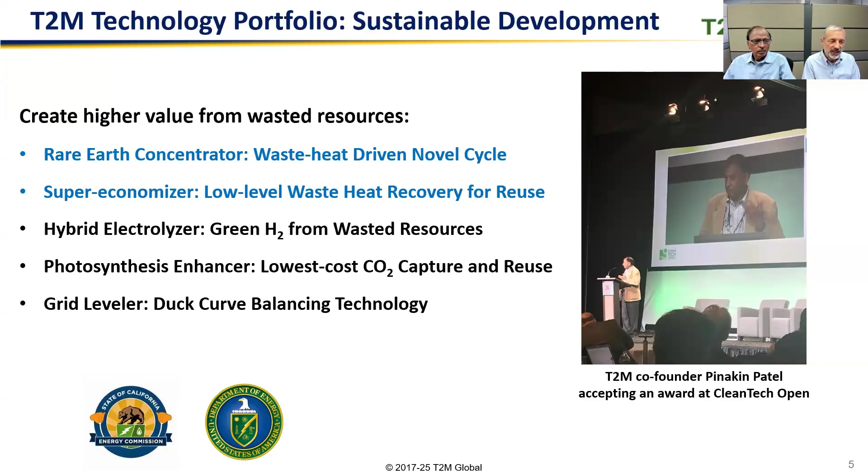We have a strong team with over 300 years of combined experience in new energy technology development. We're very fortunate to have an excellent advisory board with prominent advisors, including professors and former managers from DOE, CEC, and utility companies. And we have a good balance of public-private partnerships and university partnerships.

Waste to value technologies, which we call WTV for short, support the circular economy. Specifically, we focus on using them to increase manufacturing competitiveness in an environmentally sustainable fashion, using what we call an R3 approach for WTV technology: recover, recycle, and reuse. I'll highlight a few examples of WTV technology in the next few slides.

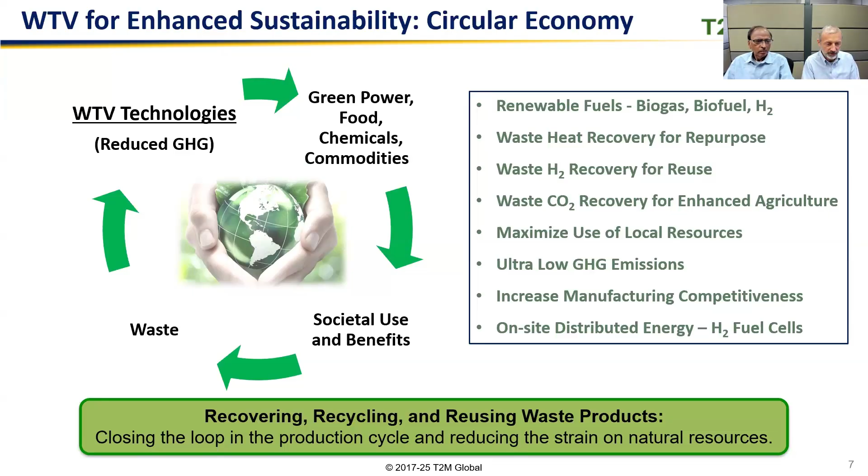In the case of trigeneration technology, human waste is converted to biogas in an anaerobic digester, and then a fuel cell extracts hydrogen from the biogas and converts it to electricity at high efficiency. The fuel cell also co-produces high temperature heat, which can be used to produce steam for manufacturing processes. The third co-product in trigeneration is renewable hydrogen, which is extracted from the fuel cell exhaust.

And that hydrogen can be used to power fuel cell cars and trucks, or as a chemical in petrochemical plants. Pinakin led the development of this new technology, which you see here on the top left, a first of a kind in the world unit.

It was demonstrated for multiple years in California. Then Toyota picked up on the idea and supported a 10 times scale up at the Port of Long Beach in Los Angeles, which you can see on the right side. That plant has a net power output of 2.3 megawatts. It co-produces 1,200 kilograms per day of clean hydrogen for the vehicles you see there that are in service at the port or that are coming in from ships. It also co-produces 1,400 gallons of fresh water every day.

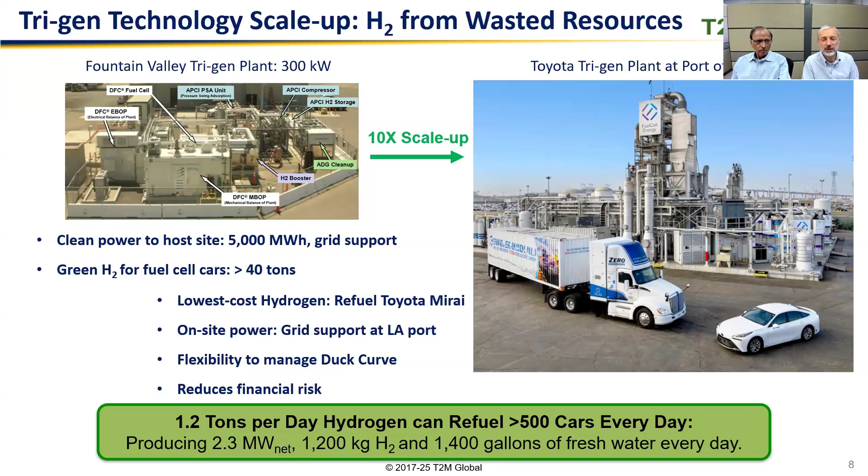Another technology we have developed to balance the grid makes use of wood waste, mostly from wildfire prevention efforts and forest management activities. This can pile up in huge quantities in wood yards, as you can see on the left here. And that gets converted to green syngas in a novel biomass gasifier.

Using excess electricity, T2M's proton pump then converts the syngas into renewable natural gas and clean hydrogen. That can either be used in a refinery here or converted to high efficiency stationary fuel cells to provide demand response for EV charging, microgrids, or for on-site power.

And we believe that this technology could be very useful in remote areas such as critical materials mines that don't have a grid connection.

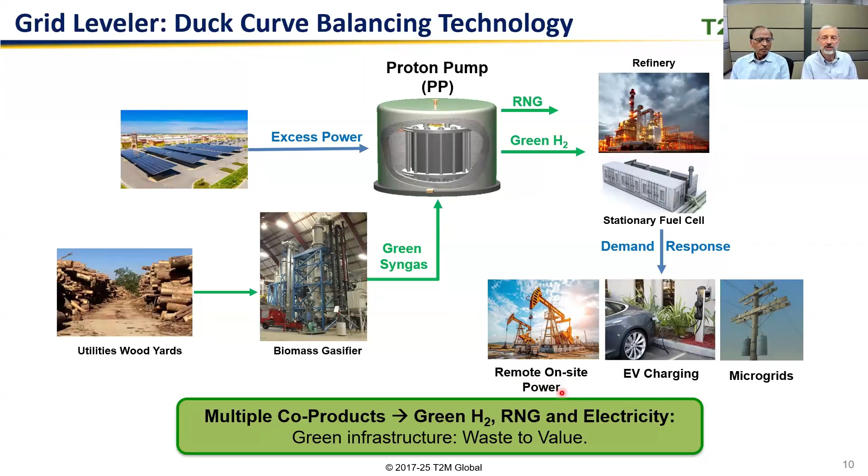So the next 5 slides focus on low temperature waste heat, how we can recover it cost effectively, and what we can do with it. Out of 100 quads of energy used in the US every year, about 25% is lost as low-grade waste heat. And that corresponds to a $200 billion lost opportunity.

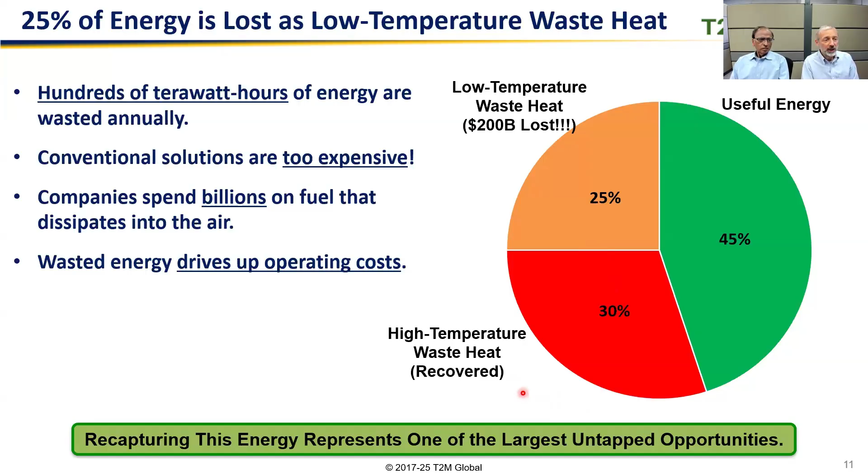If that low temperature waste heat could be recovered and used, it could really lower operating costs and increase US manufacturing competitiveness. It's one of the largest untapped opportunities. And all that is because conventional economizer technology is too expensive.

That's why our team has developed super economizer technology, which has multiple advantages. First is the higher efficiency. It recovers a lot more heat. It's more compact, which is great for retrofits, as you can see on the right here, squeezed behind a process tank in a manufacturing plant.

And it's also much lighter, as you can see here, being held without effort, whereas the corresponding conventional economizer would be way too heavy to lift.

And it's also much lower cost. That means the return on investment can be as short as 1 to 2 years compared to 5 to 15 for conventional economizers. An important feature for lithium extraction is that it has much better resistance to corrosion and fouling, and Pinakin will elaborate on that later.

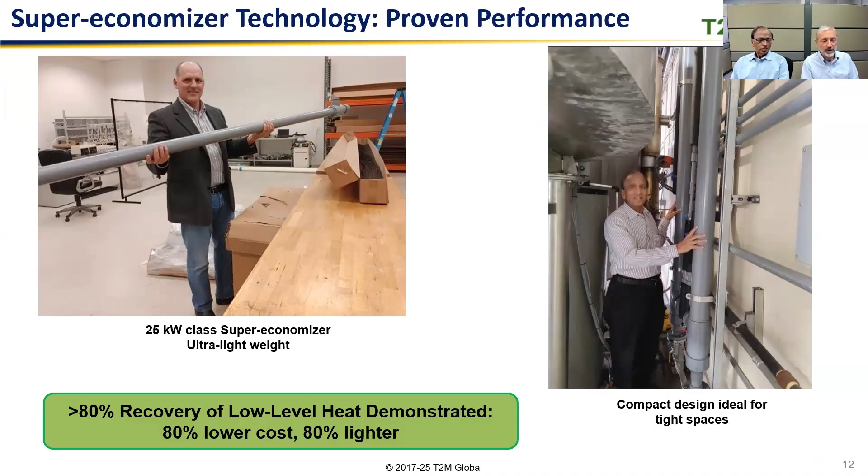So very useful for critical materials. Now, this table shows data from the 25 kilowatt super economizer testing. You can see heat exchange effectiveness is more than 80%, which is about twice that of conventional heat exchangers. And we have multiples of these in operation at a manufacturing site for now well over 10,000 hours, and we're observing stable performance.

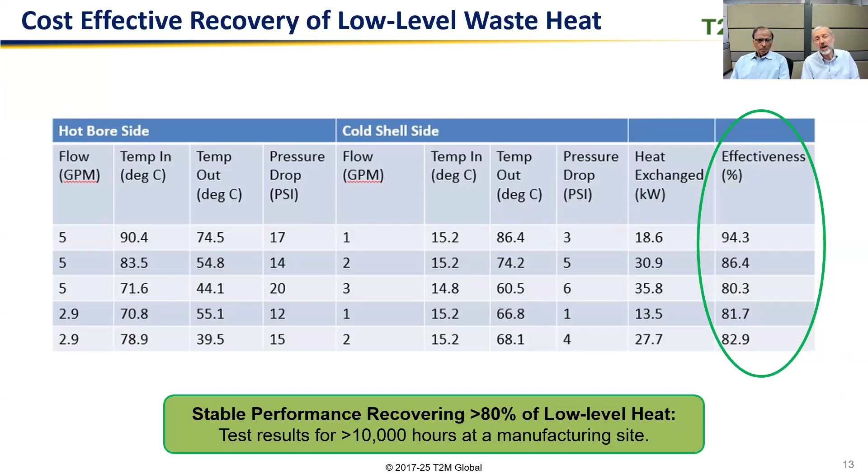So what can we do with 60 to 80 degrees C heat, you may ask? It can be used for process improvement or power production. So here we show the power production.

Current commercial cycles, such as Rankine, Kalina, and so on, they're not cost effective for low-level waste heat. They use reciprocating engines or steam turbines. And we have developed a novel cycle that we call Pinakin cycle to convert this low-level waste heat to clean power. So it uses a novel membrane, which then pressurizes a fluid which goes to a water turbine.

That's very well proven technology and lower cost than steam turbines and very reliable. Now here the waste heat comes in with the super economizer that's used to separate the fluids again, and they go around in a loop. So there are no emissions of this whole cycle. We've demonstrated it at 5 kilowatt level and now scaling up to 25 kilowatt.

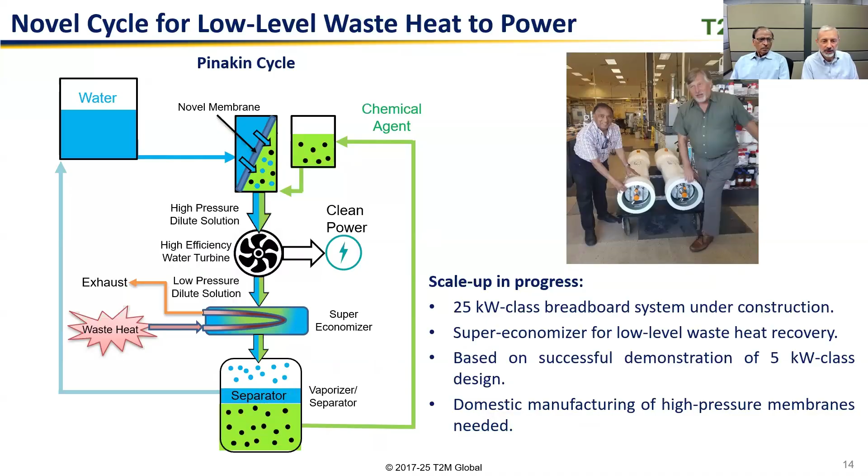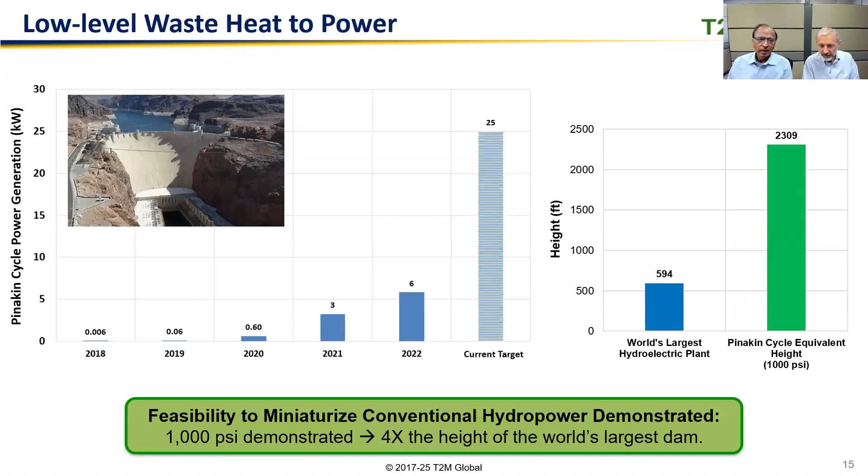DLE, direct lithium extraction, is part of what I want to talk about. I want to talk about two things: how can the USA go from less than 1% to a major producer, and also bring the cost down sizably?

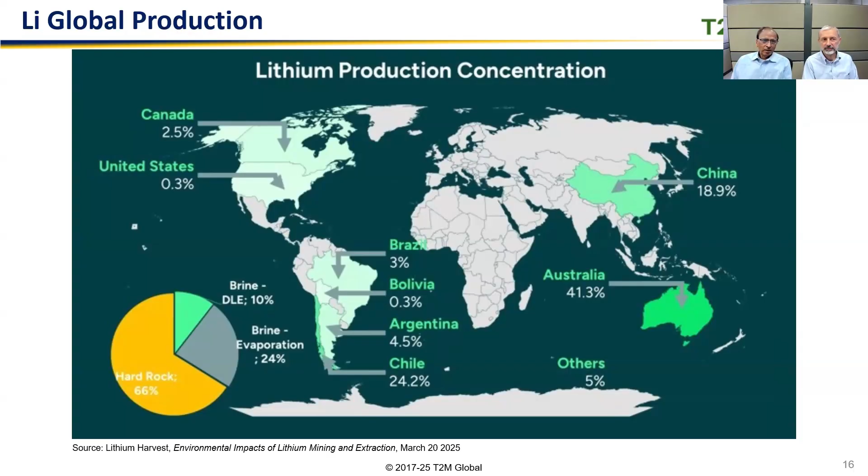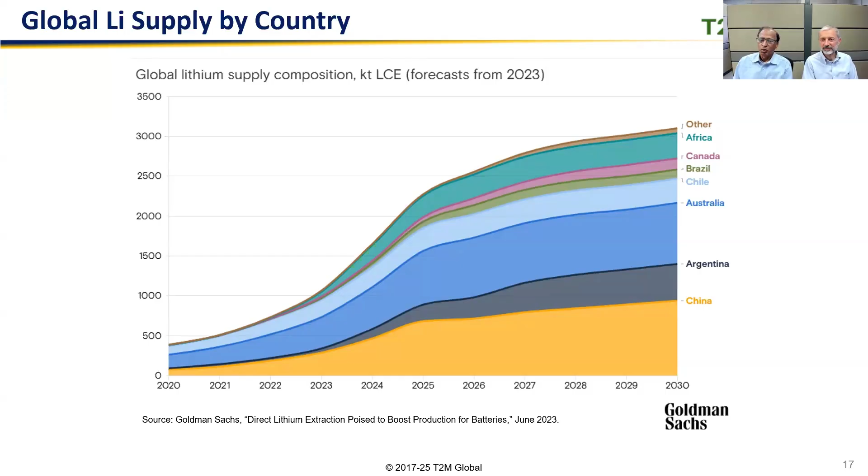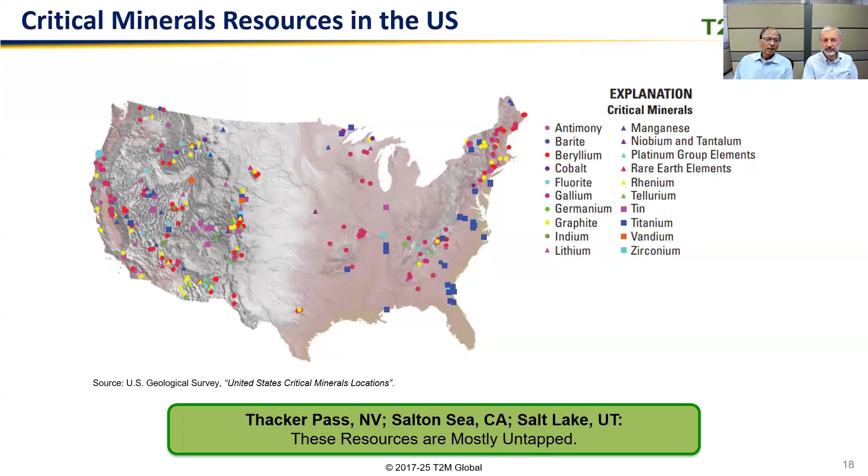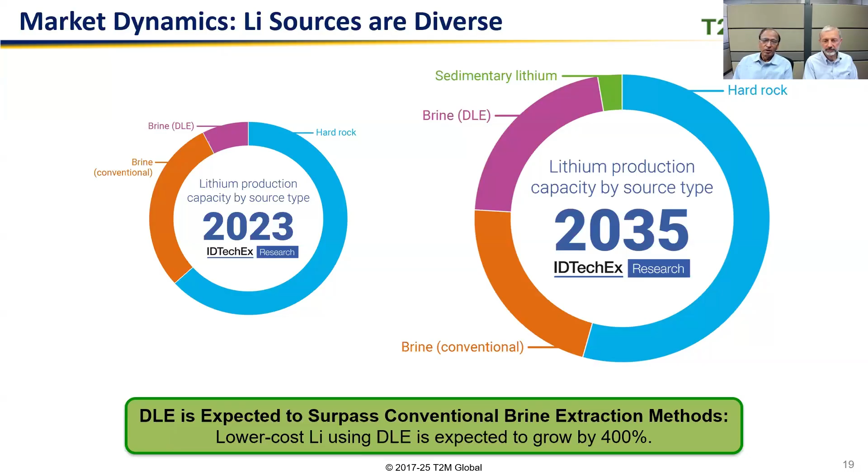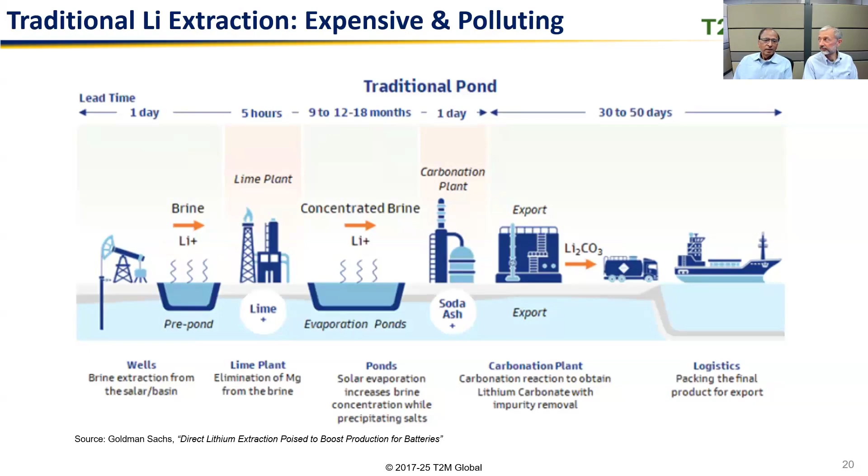Separation of multiple minerals is important, but they are also with lower value sodium, calcium, and chlorides. So you have a separation challenge with low concentration. You have to handle large amounts of water that can cause environmental impact, as well as keeping the ecological balance, which is going to be very important. Particularly in the USA, we have a lot of rules to keep safety of people and safety of the whole ecosystem.

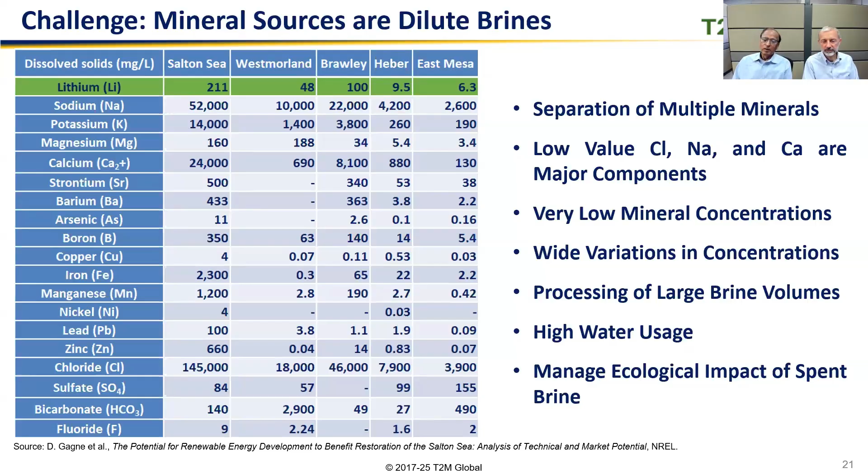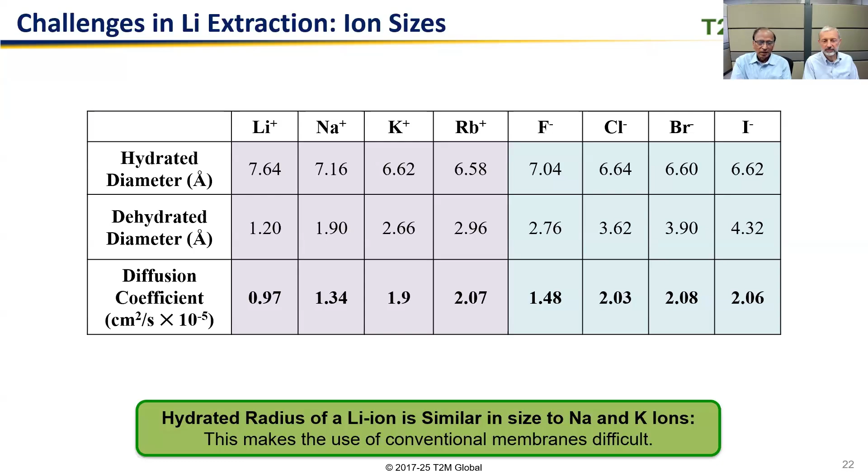The first way is separating by the diameter of ions—lithium, sodium, potassium. This shows their hydrated diameter, and you can see they are pretty similar, so it's very difficult to separate lithium from sodium and potassium using conventional membranes. So you need more selective membranes, and I'll talk about that. If you look at the dehydrated diameter, you see the differences, and that can lead to some potential innovative processes. Quite a few companies are looking at that, and we'll talk about that next. So these are the high-level technologies.

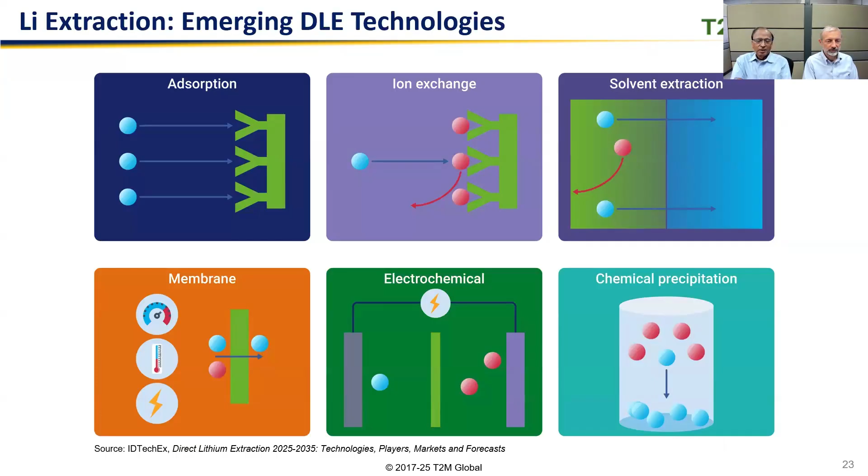Emerging DLE technologies include adsorption, where selective adsorption of lithium ion or lithium compounds takes place, followed by desorption to recover it. Similarly, you can apply more selective ion exchange methods, solvent extraction, or highly selective membranes.

More recently, electrochemical processes are being investigated. Ludwig and I spent our careers mostly in electrochemical cells, and this system does provide unique advantages, but there's also quite a bit of work involved. At the end, you want to preferentially take out your salt, lithium carbonate.

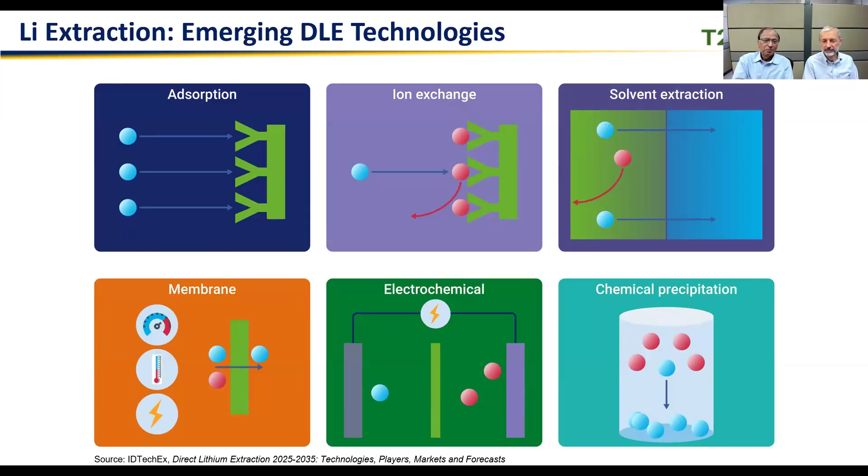So let's see where these processes stand. These are similar technologies: adsorbent, ion exchange, and electrochemical separation. You can see the adsorbents are being used commercially. They have an adsorption, desorption step, sub-batch process, and that has a challenge of cost effectiveness, though more than 80% recovery has been demonstrated, with a potential of going more than 90, as much as 99%.

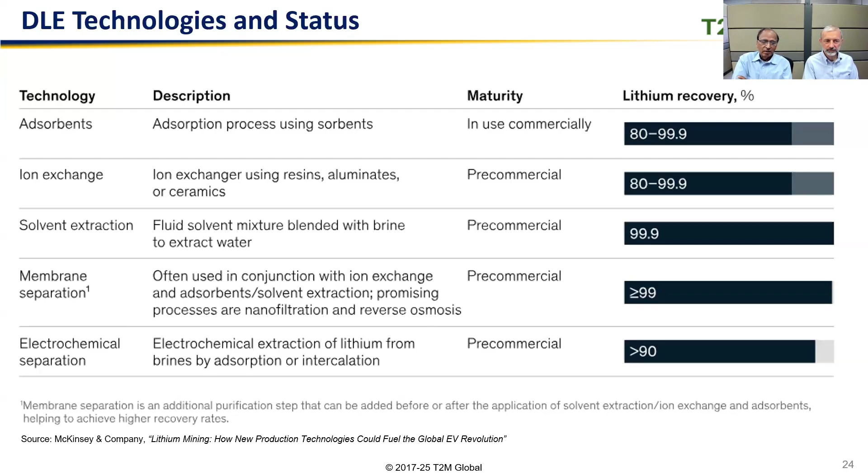Ion exchange, solvent extraction, membranes - they use different materials to do the work, but they are all under development, what we call pre-commercial stage, though they promise greater than 90% recovery of lithium. So let's look at some of them.

Advanced membranes - it's very interesting to note that for the technology Ludwig described on our membrane, waste heat to membrane power, what we're calling the Pinakin cycle, there are no major manufacturers in the USA. Innovation in membranes is now happening in other countries. So this is a very important low-hanging fruit.

Which are the membranes? Reverse osmosis, nanofiltration, ceramic membrane. Fuel cells are based on ceramic membrane. For example, Fuel Cell Energy and Bloom Energy, they lead in ceramic membrane manufacturing, particularly with electrochemical applications. So the membrane area is a very important part, but it has to be also in conjunction with other steps, as shown here.

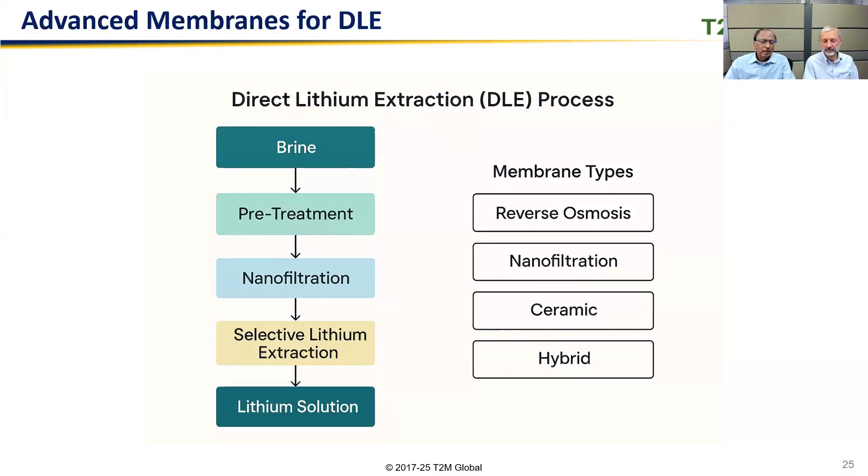I'll explain this more. So where are the membrane pathways? Same membrane list on the right. What are the advantages? Reverse osmosis is the most proven - it gives you 50% to as much as 90% water recovery, which concentrates the lithium.

But because you have membrane fouling issues, the lithium recovery could be limited, so it's used as a pre-treatment. You concentrate to a certain level, then go through nanofiltration, ceramic, or hybrid membranes. The last one is what we project has a bigger opportunity, because it's running on very little electricity - you have waste heat you're throwing away, less than 100 degrees C, and you can drive forward osmosis. That's the membrane module I'll explain to you.

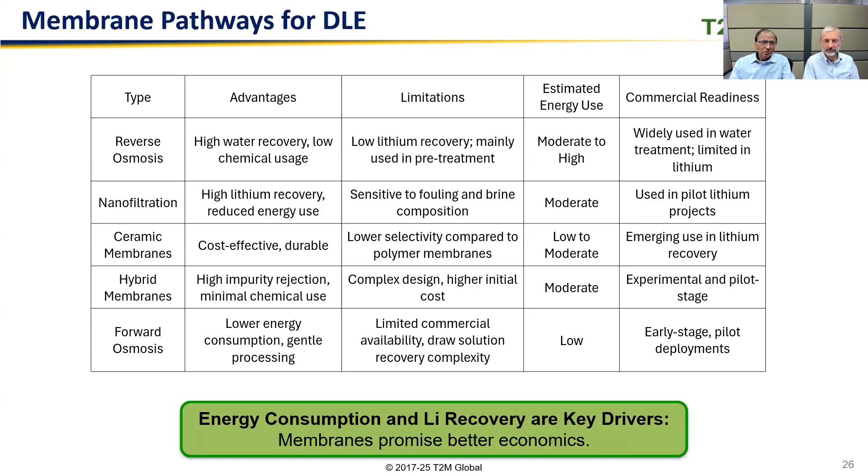So now you end up with lithium chloride. And that lithium chloride, using the forward osmosis membrane concentrator - that's what Ludwig talked about earlier - the technology our team is working on can concentrate 2 to 10 times lithium, depending on how you run it. It also provides high quality water as a byproduct.

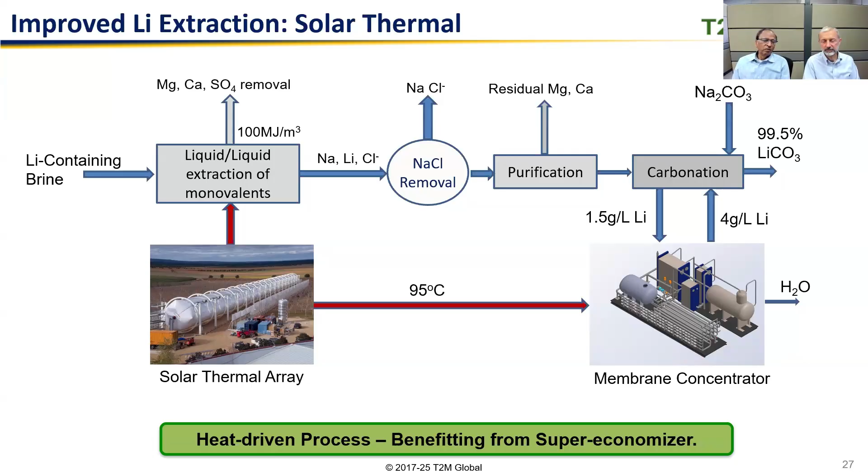So this benefits from super economizer technology as well as solar heat. Now, the waste heat driven process - you look at the solar, the lithium salars, brine, and using the module of advanced membrane. And as you saw earlier, lithium carbonate is the product.

What is unique is that in the process you are using heat, and that low level heat typically goes into a cooling tower. That heat now is a right input to produce electricity using the super economizer and water turbine cycle that you saw earlier. So this is the unique WTV technology - the waste heat and the very dilute concentration, and now you can get electricity back. So basically, this makes you more sustainable with greater manufacturing efficiency and lower cost.

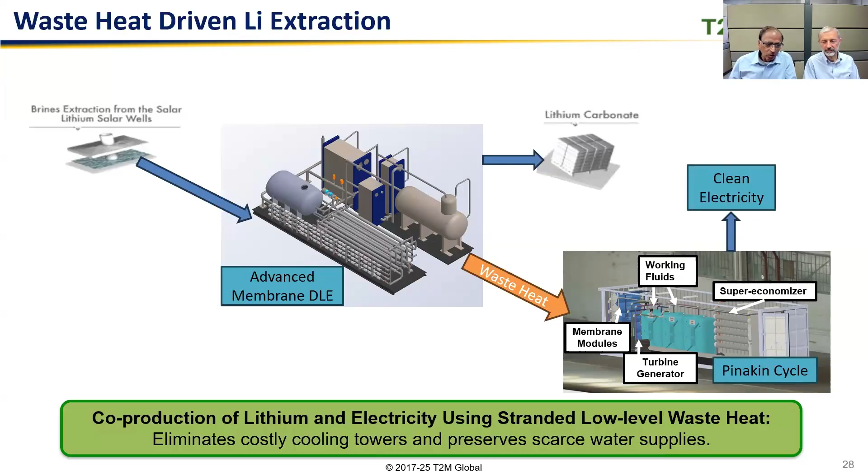Another application after solar thermal - you can combine with geothermal. The bottom half is the production well on the left-hand side, where the hot brine comes out. On the right-hand side is the injection well - after separating lithium, you put everything back in the ground. So you're not changing anything, no environmental impact. You selectively took out the lithium. How did you do that? It's the same cycle.

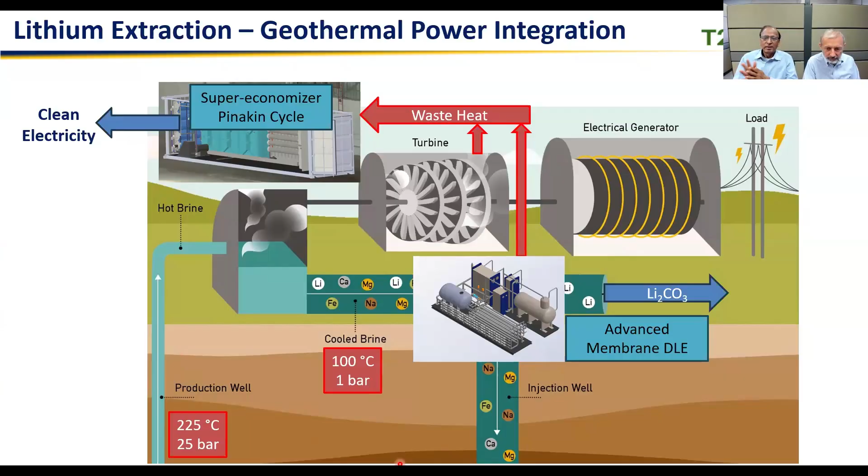You use first waste heat driven advanced membrane, but then the leftover waste heat goes into our super economizer cycle, and that electricity you produce will support your lithium extraction process. So this is a win-win combination of high level heat available from geothermal, running a turbine, and then powering advanced membrane. The combination results in lower cost lithium extraction.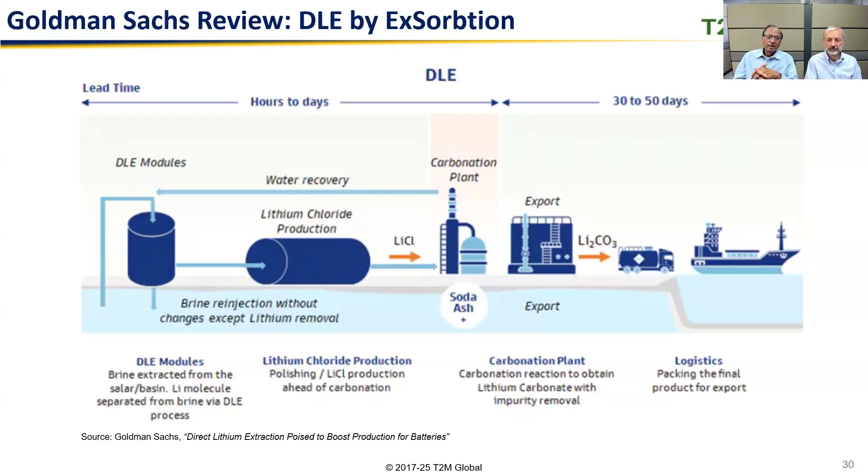So where is ExSorbtion now? They have shown in the lab greater than 99% lithium selectivity, which is excellent. Their efficiency numbers are greater than 90%. They have shown 500 cycles based on manganese-based sorbents, with lithium uptake about 10 milligrams per gram of sorbent. If this capacity can be increased, it can reduce cost sizably. Regeneration time has also been improved.

It is versatile across varying concentrations of lithium, and the use of CO2 makes the process a carbon sink, so you are benefiting from CO2 emissions. The most important value is that the lithium carbonate is directly compatible with market demand. It has been tested with oil field and geothermal sites, and smackover brines from USA, Canada, and Argentina.

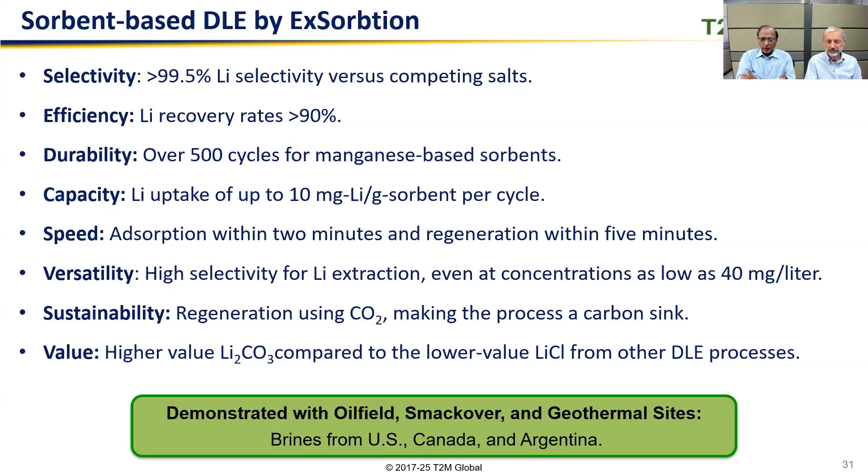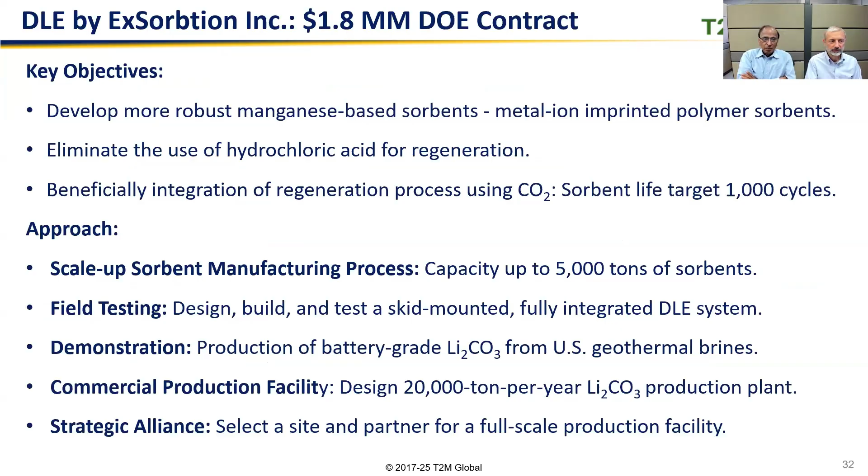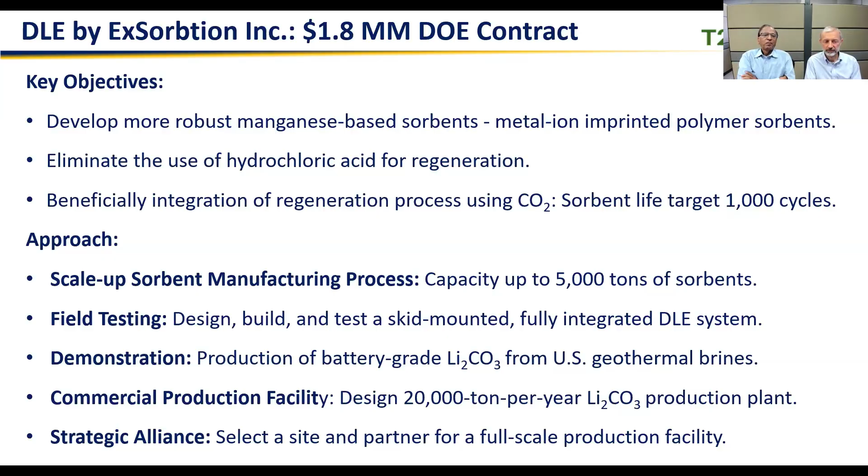Where they are now, they have about a $2 million DOE contract to improve the sorbent robustness, make it more diverse with greater selectivity, eliminate use of hydrochloric acid which is an environmentally attractive goal, and integrate CO2 and double the cycle life. They are also looking at scaling up the sorbent manufacturing process, doing field testing, and commercial production facility design. This is a very important step being taken by DOE.

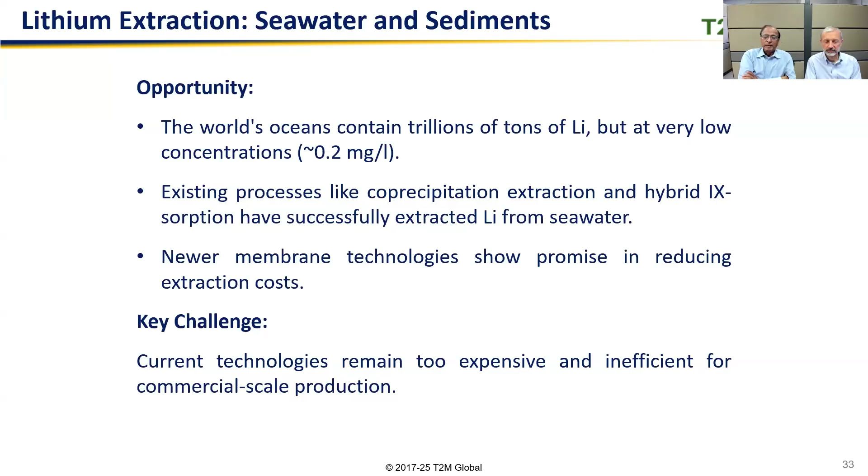Seawater is the largest source of lithium, and for that matter all minerals, but they are extremely dilute, about 0.2 parts per million, sometimes even less depending on location. Existing processes like precipitation and hybrid adsorption have extracted lithium from seawater, and newer membrane technologies can reduce the extraction cost. Most important is reducing the capital cost and operating costs needed for commercial scale-up.

Another technology is electrochemical. The diagram is shown on the right. Saudi Arabia is doing quite a bit of work in this area. This uses an electrochemical cell with a ceramic membrane, lithium lanthanum titanium oxide, LLTO. Co-products are lithium, chlorine, and hydrogen. They have tested 0.18 ppm lithium over multiple cycles, concentrating it to 9,000 ppm.

There is a control factor. Electricity consumption is important. Today's electricity cost is $5 per kilogram of lithium, and that needs to be reduced, along with development of a more robust membrane.

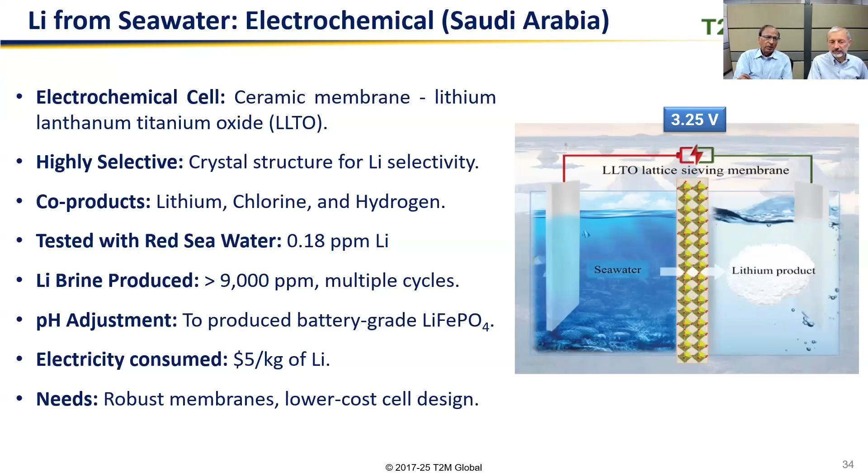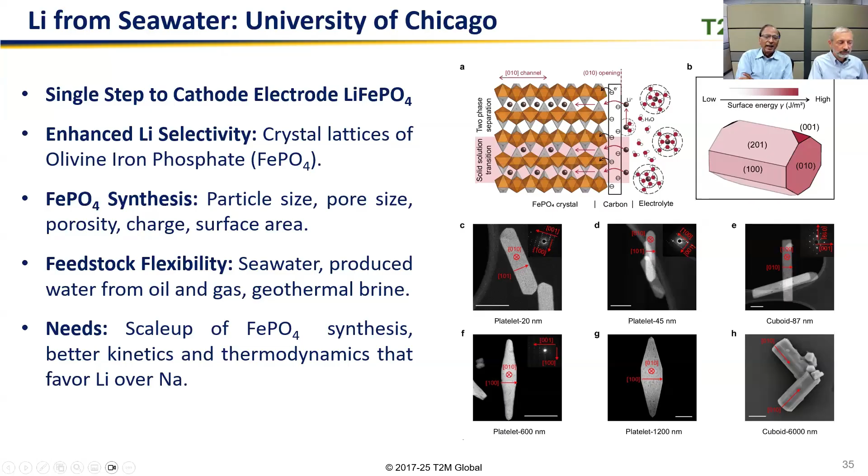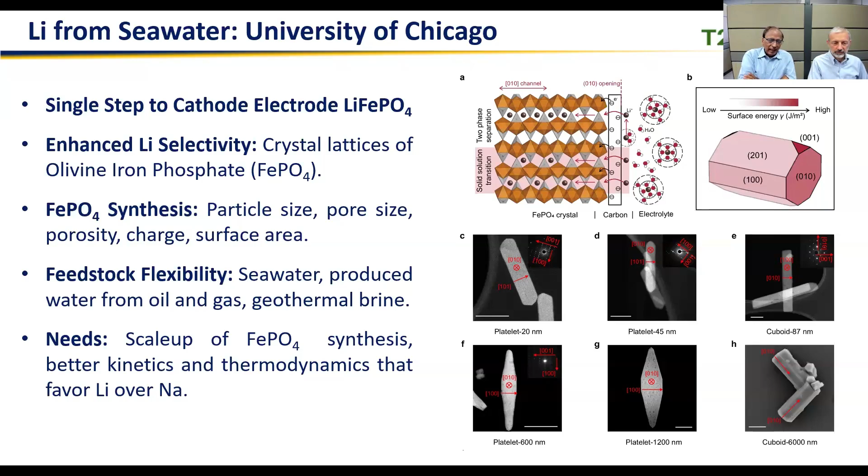University of Chicago has a parallel technology that uses iron phosphate, particularly lithium iron phosphate. This is popular for LFP battery electrodes, good for stationary power, and it's a single step to battery material. What is required is olivine iron phosphate, with a specific design of its morphology and crystals. Particle size, pore size, surface area, and charge must be properly controlled to get the feedstock flexibility needed to operate on seawater. What's needed is to scale up, improve the kinetics, and achieve better selectivity of lithium over sodium.

The R&D challenges are making the membrane more robust and scaling up the process in a cost-effective way. This technology has been tested in the lab, but it still needs to be tested with real seawater.

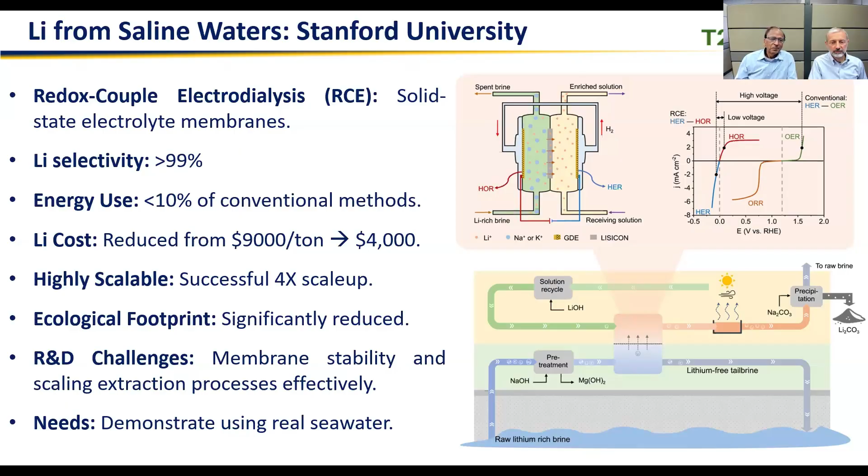Very interesting thing is, as you saw, USA does not have any lithium production, but the awareness has resulted in Thacker Pass, Humboldt County, Nevada. This has the world's largest known reserve of lithium in USA. That means we have potential to become like oil production, world largest, Saudi Arabia type lithium production in USA.

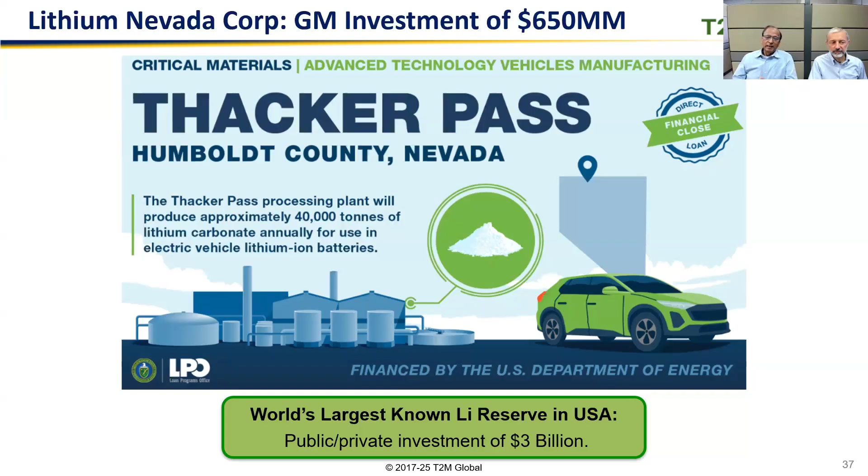And there's an excellent project, public-private partnership, $3 billion investment with GM participating at $650 million. And we see our WTV technology has a good fit in that.

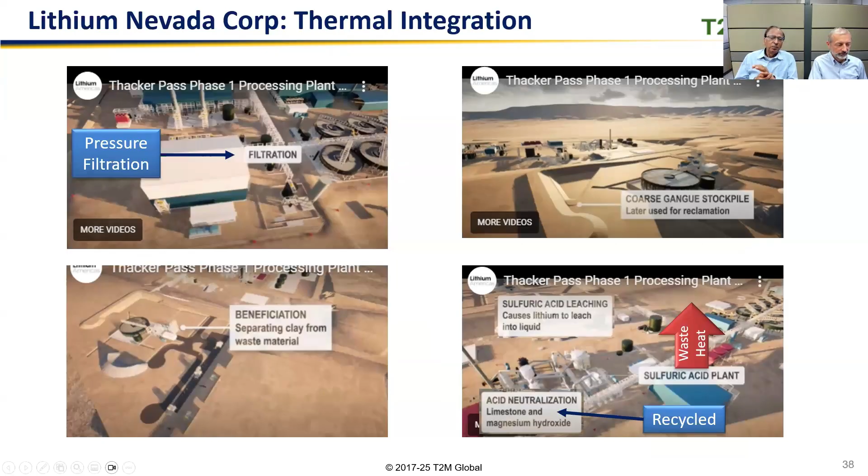That's the next slide. This shows they have phase 1, phase 2. Phase 1, they are going up to certain size and proving all components. And they are showing how the pre-treatment step, processing step will take place. And for leaching the lithium, they're using sulfuric acid.

Now, sulfuric acid is very effective, but at the end, you have an acid neutralization. That requires additional steps, cost. And if you can recover, reuse acid, it's a great idea.

The opportunity we see of waste heat is sulfuric acid reaction is very exothermic. And they are using some turbines to recover that heat, but low-level heat is planned to go to the cooling tower. This is where our super economizer technology can improve its energy efficiency by an additional 20%.

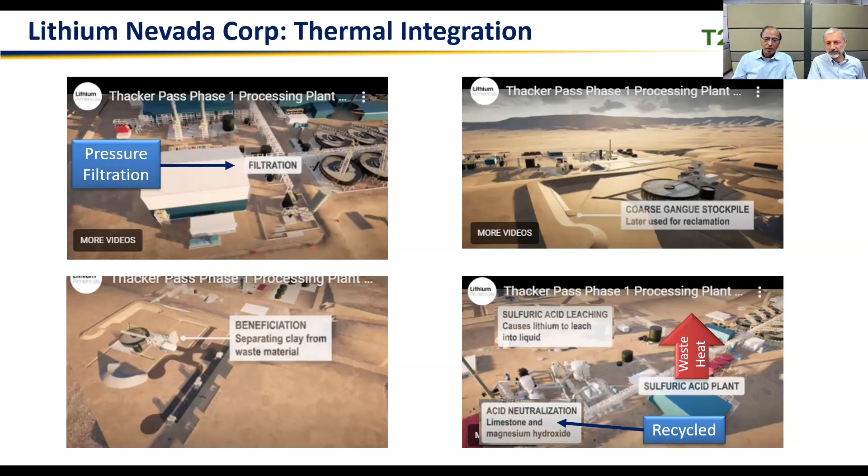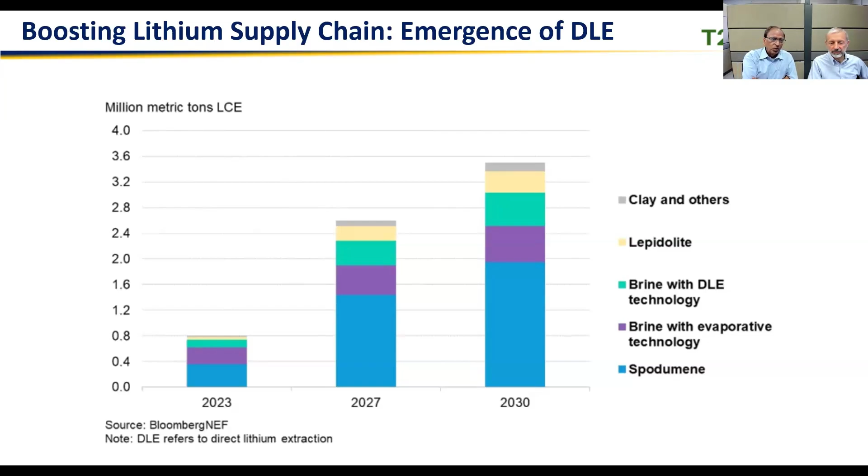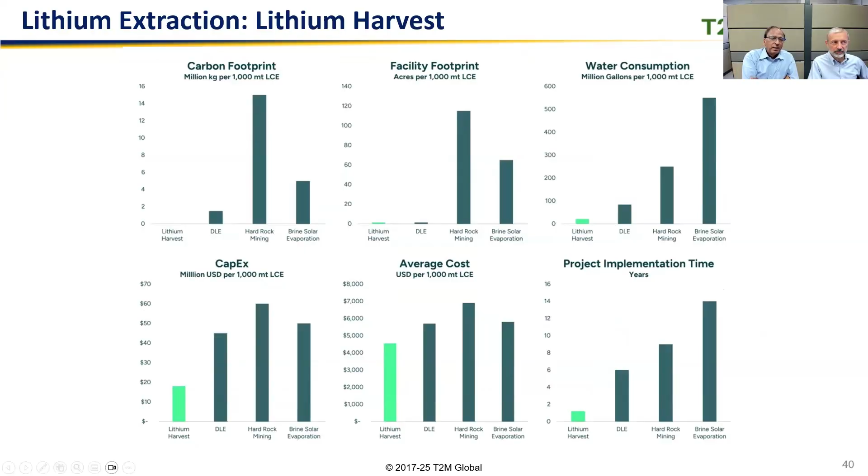Now, how does the DLE compare? You can see in all the charts - carbon footprint, facility footprint, water consumption, capex, cost, and implementation time - all of them show DLE is very promising compared to today's feedstocks, hard rock and brine, solar evaporation.

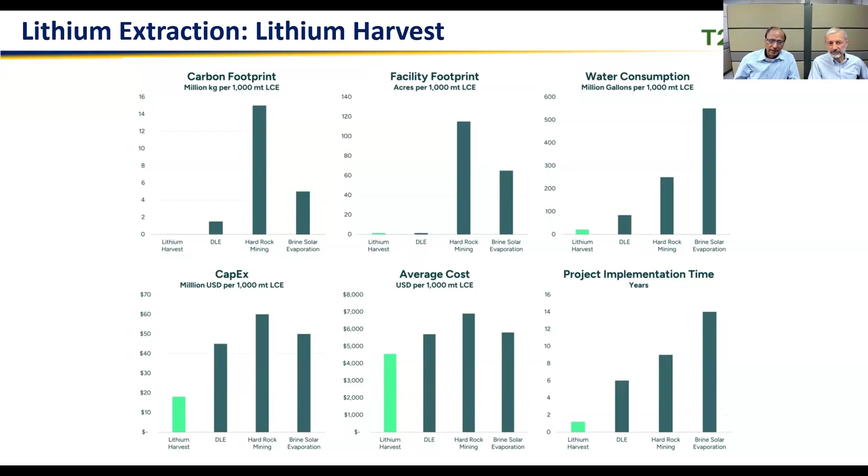So with that, we'll take any questions you may have.